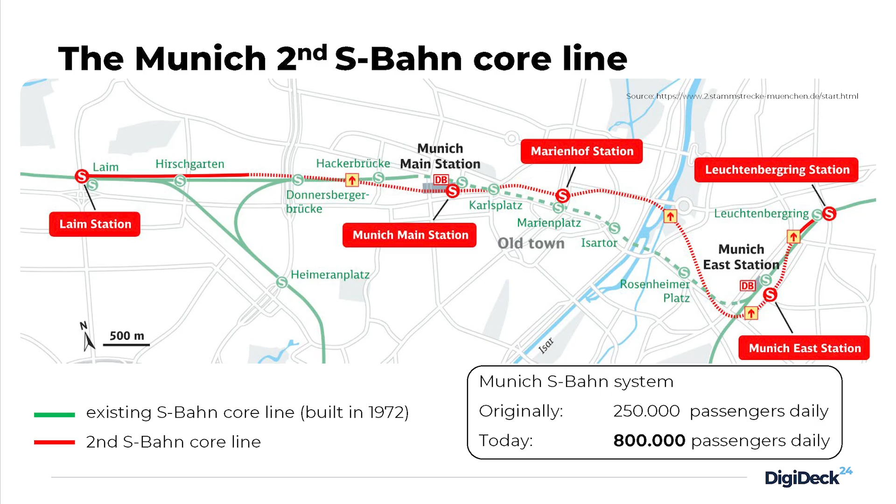As a result, in order to release the pressure on the existing core line, a second core line is to be built, and you see it here, it's the red line. It has the same direction from east to west, going through the center. The heart of the new line is a 7-kilometer long tunnel from Munich main station to Munich East, with Marienhof being the intermediate station.

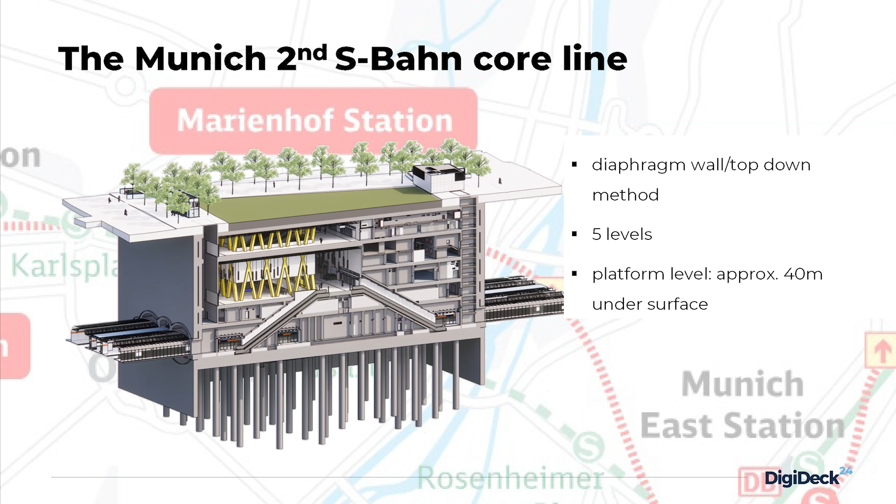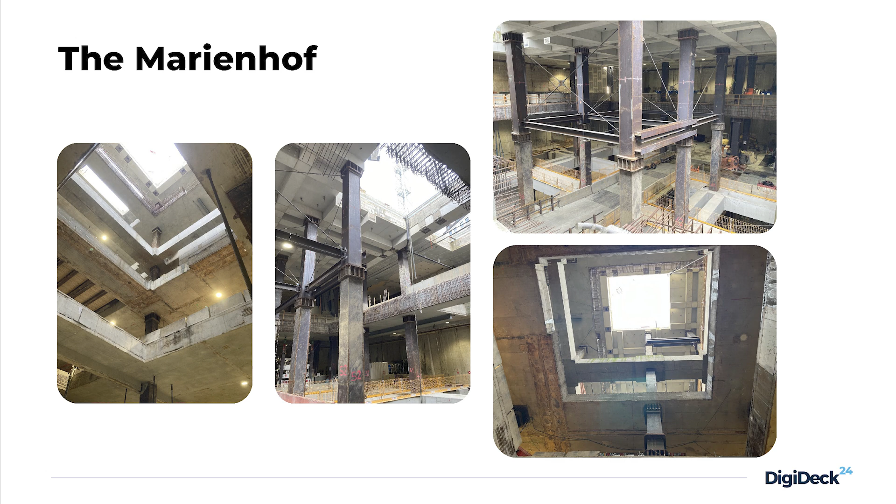Now, about the station itself, there are only 3 points I would like you to remember. The construction method used was a classical diaphragm wall, top-down method. The station has 5 levels, with the platform level being at a depth of 40 meters under the surface. Here are some pictures from the construction site, because everything looks small on our computer screens, but the actual dimensions on site are very impressive. You see, we have already reached the excavation level of the -5th level, so it can be even a little bit claustrophobic to be down there.

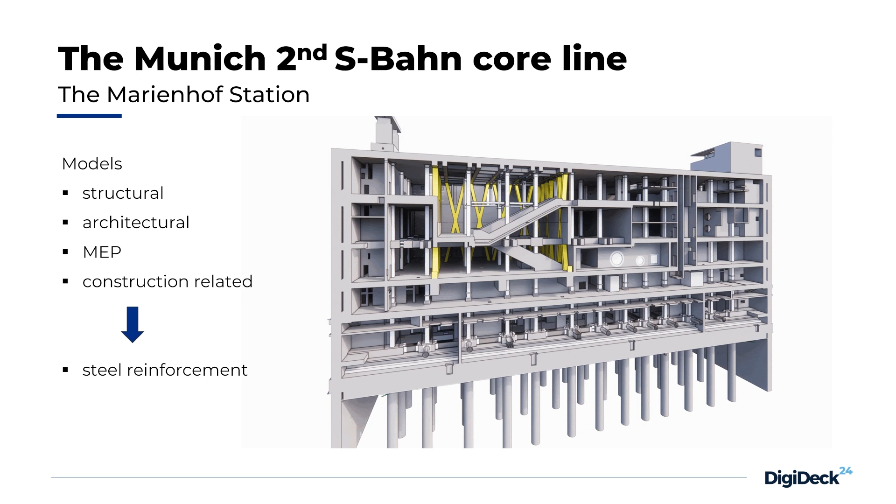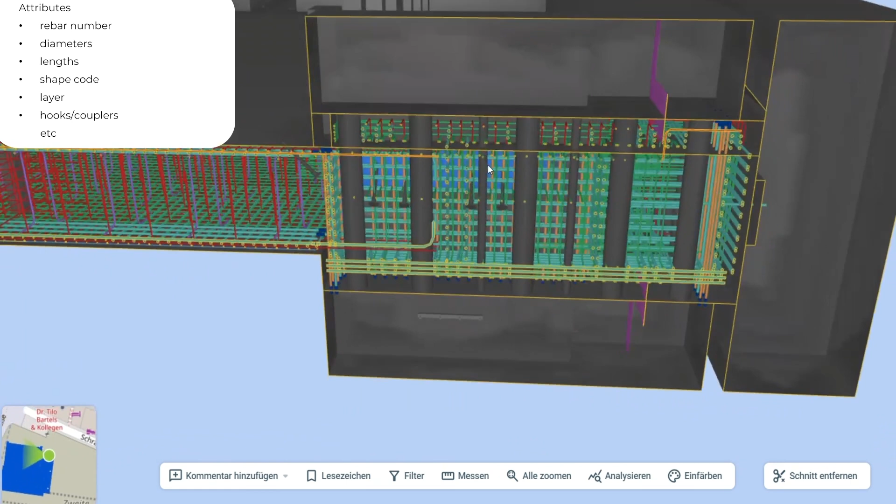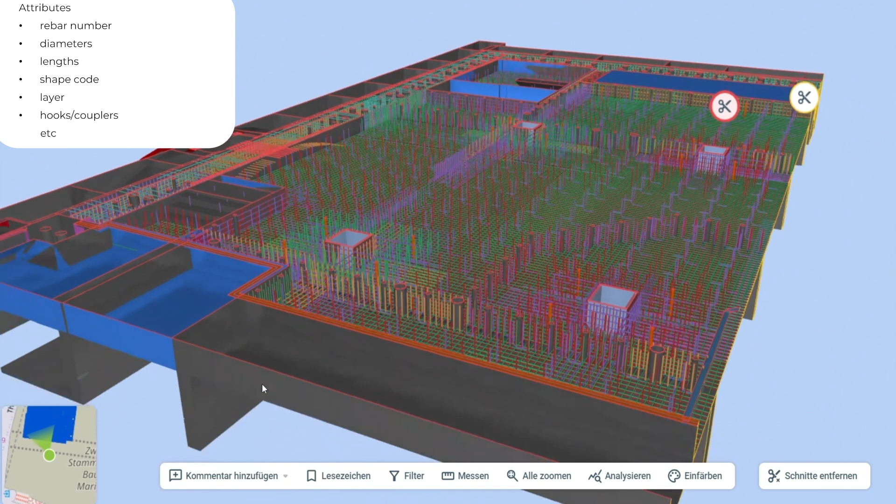Here you see an example of a reinforced slab. Of course, at the beginning there were some challenges with the modeling aspect, the software aspect, also considering the complexity of these components. For example, this slab is 1.5 meters high, almost my height. It's highly reinforced. Often we have 6 layers of reinforcement at the bottom, 6 layers at the top. Also remember, because of the top-down method, slabs are constructed before the walls and not the other way around. So we need to provide connecting reinforcement for the walls underneath and above the slab.

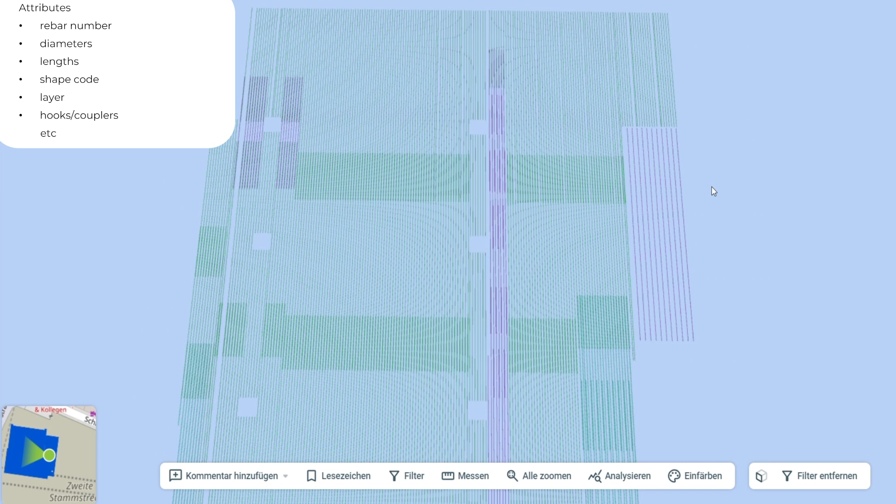So there are complexities, there were challenges, but they were in the end minor challenges because we were very soon able to create 3D reinforcement models without extended problems. Also, the BIM information content, the classic content, let's say, applies also for these 3D reinforcement models.

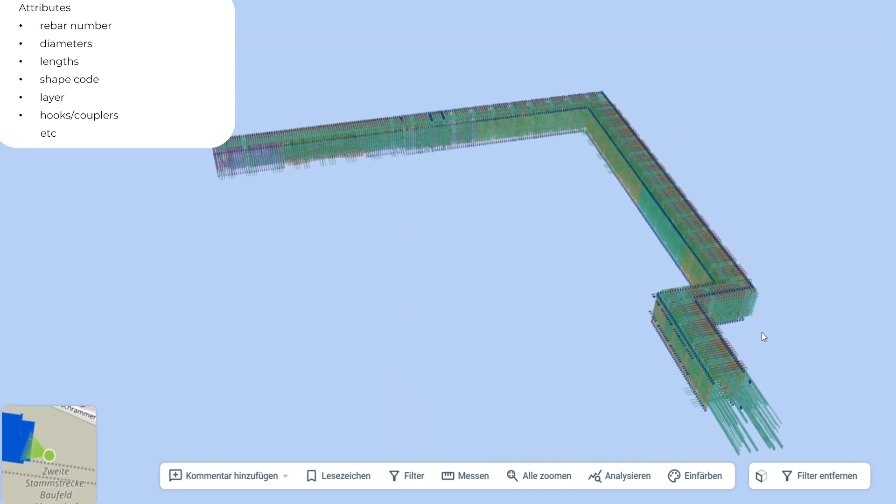We have information about the rebar numbers, the diameters, the lengths, the layers, the end treatment descriptions. Is there a coupler or a hook at the end of the rebar? So everything is included in the model, which makes it very easy to create lists, tables, and views according to these parameters. So far, so good. We have 3D reinforcement models. How do we proceed? What do we do with these models?

A few words about the conventional reviewing workflow. It looks somehow like this. We, the designers, produce statics and reinforcement drawings for the building owner, which are then reviewed, checked and approved by an external structural engineer.

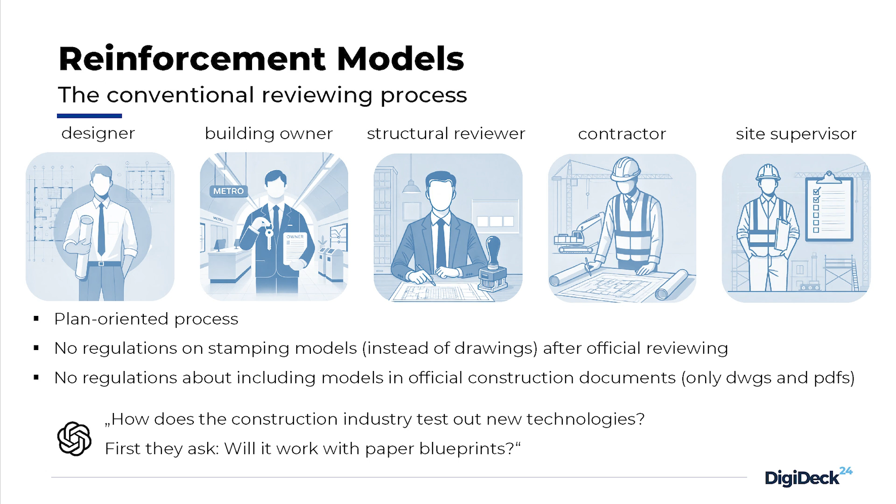After the approval, the reinforcement drawings are delivered to the contractor, the reinforcement is installed on the site, and in the end, the site supervisor comes, documents the installed reinforcement, and the reinforcement drawings are archived and become part of the official construction documents. So as you can imagine, the whole process is plan-based.

And there are compatibility issues with 3D reinforcement models, mainly in a bureaucratic sense. For example, there are no regulations about digitally stamping models, digitally signing models for official approval, or there are no regulations yet for including models in the official construction documents. Until now, only CAD files or PDFs are allowed.

Also, let's be honest, going directly from 2D reinforcement plans that have been used for 100 years to having a rebar model of this complexity on an iPad on the construction site seemed like too much of a big step. So we try to be realistic, and we try to find a middle solution, which are simplified drawings that accompany the 3D models. For example, you see here one of them for the slab.

There is a view of the layout of the reinforcement. There are some rebar tags and dimension lines because it's easier to have this dimensioning instead of having to measure the dimensions on the 3D model every time. On the other side, there are no rebar shapes on the plan like in the conventional reinforcement drawings because the rebar shapes can be easily seen on the 3D model.

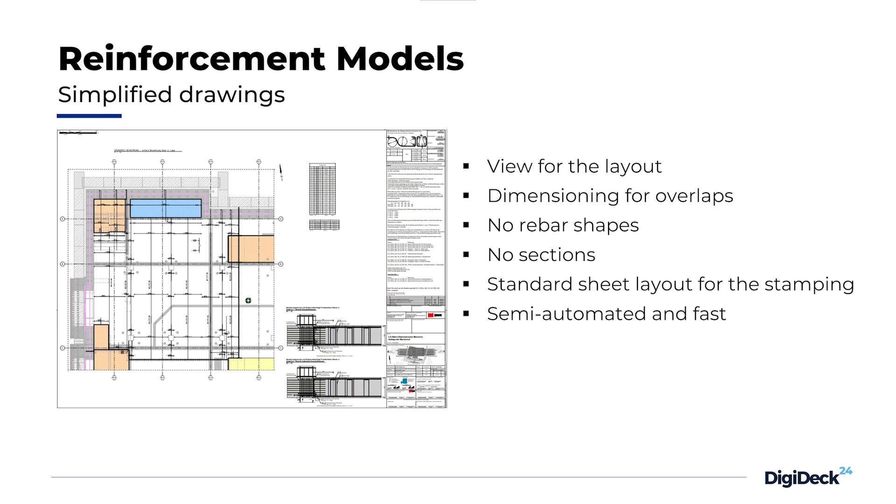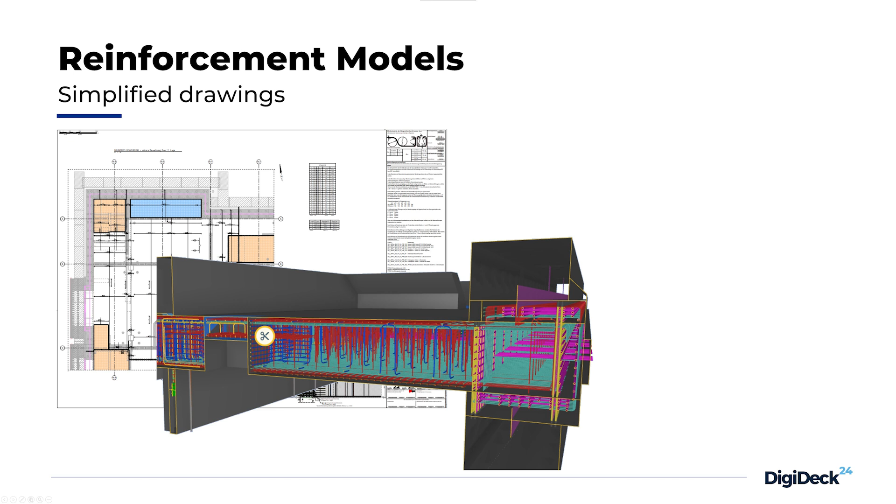Now, don't get me wrong, because these simplified drawings are by no means real reinforcement drawings. They are not sufficient in order for the reinforcement to be installed on the site. The model, on the other side, is not capable of going through the review process alone for the moment. Only the combination of those two can actually work.

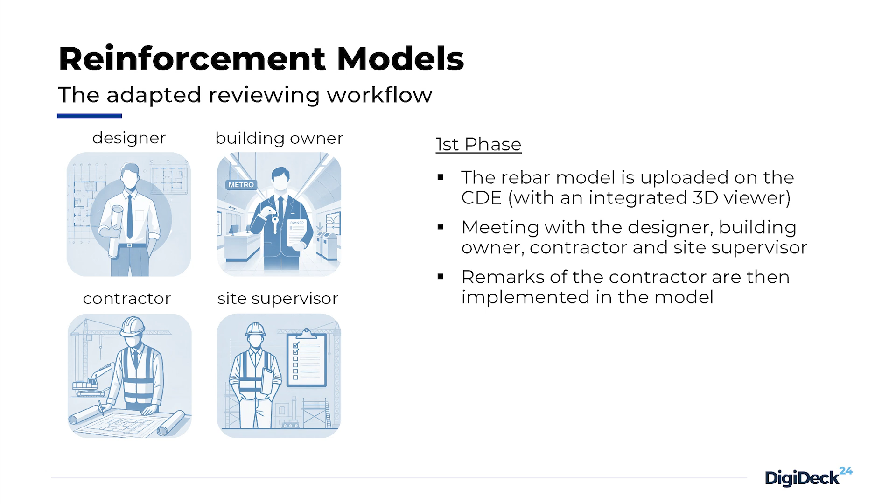So now we have different working material. Instead of having 2D conventional reinforcement drawings, we have 3D models plus simplified drawings. So we also need to adjust the reviewing workflow that now consists of 2 phases. In the first phase, we upload the model on a common data environment. It's a platform with a 3D integrated viewer where all parties have access.

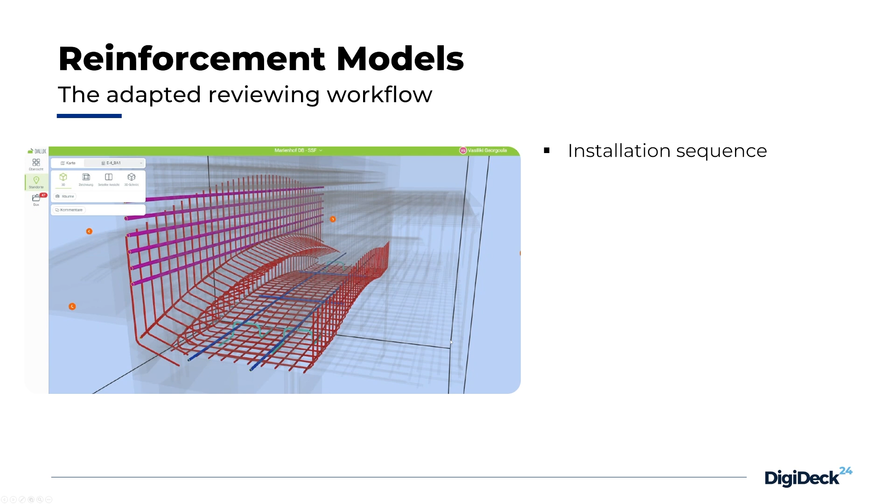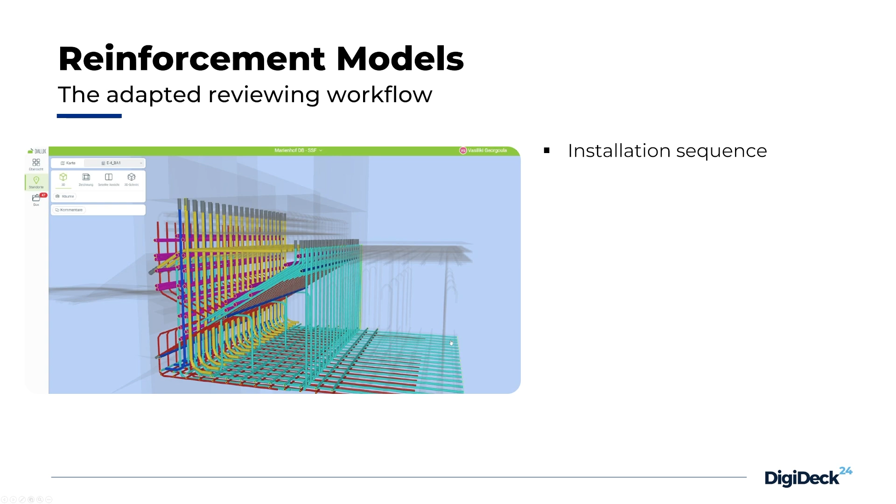And then we set up a meeting with the designer, the building owner, the contractor, and the site supervisor. We sit at the same table, we navigate through the model together, and we discuss points like the following. Installation sequence of rebars, especially in the complex areas. These kind of small films are very helpful for understanding the installation sequence or even finding out if the installation is even possible. We discuss adding or adapting installation bars.

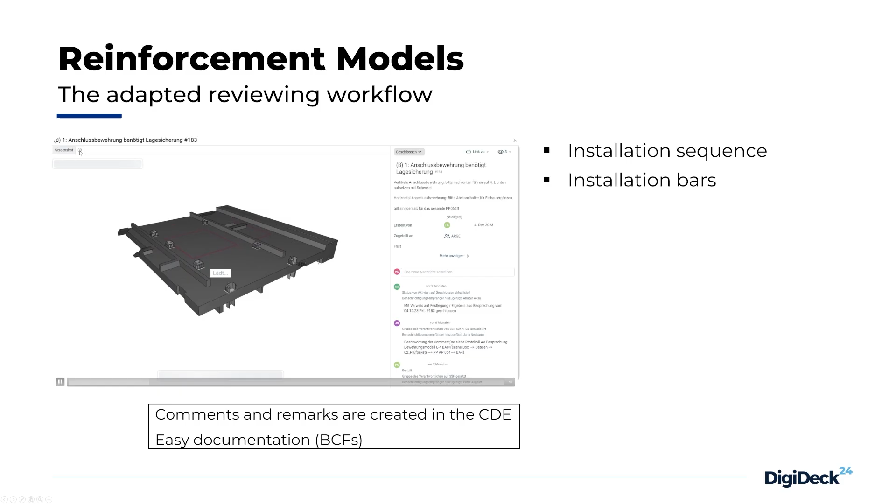Here you see an example highlighted in green. We needed to add some small stirrups or some small hooks to make everything more stable, let's say. We discuss points like these highly reinforced areas where concreting could be a problem. You see here 6 layers at the bottom and at the top. We modeled concreting openings like the green one to make sure there is enough space for the concreting. In some cases, we even needed to leave out some rebars so that there is space.

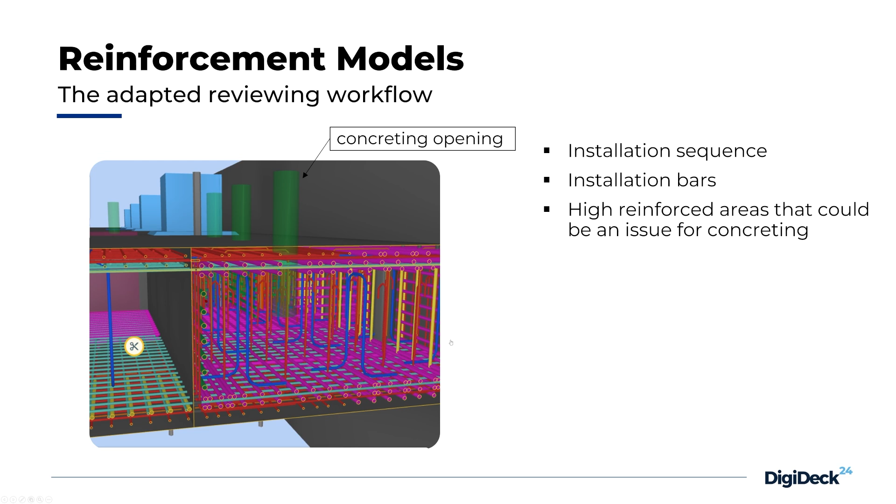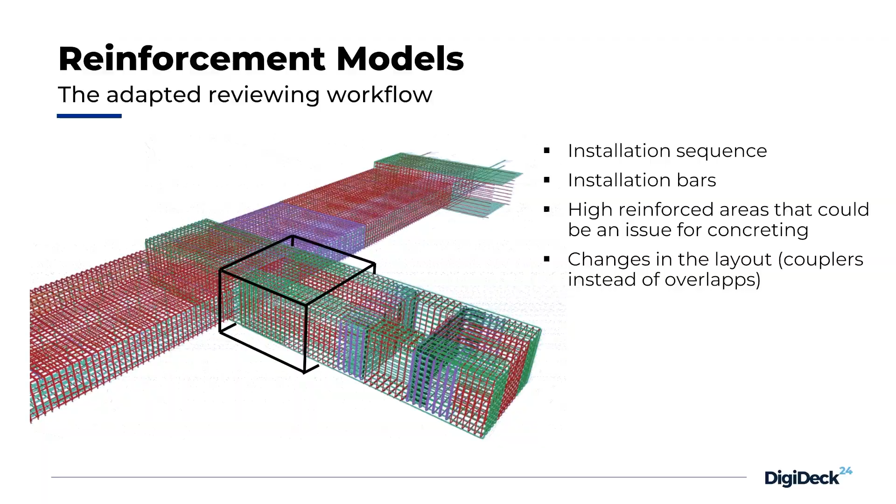Or we discuss points like changes in the layout of the reinforcement. Here you see an example of two connecting parts. They are connected by overlapping rebars. It was discussed if maybe we should use couplers so that there are no rebars sticking out of the concrete and there is more room for people and machinery to pass through this zone. And many more points, but I guess you understand the things that are discussed in this meeting in this sense.

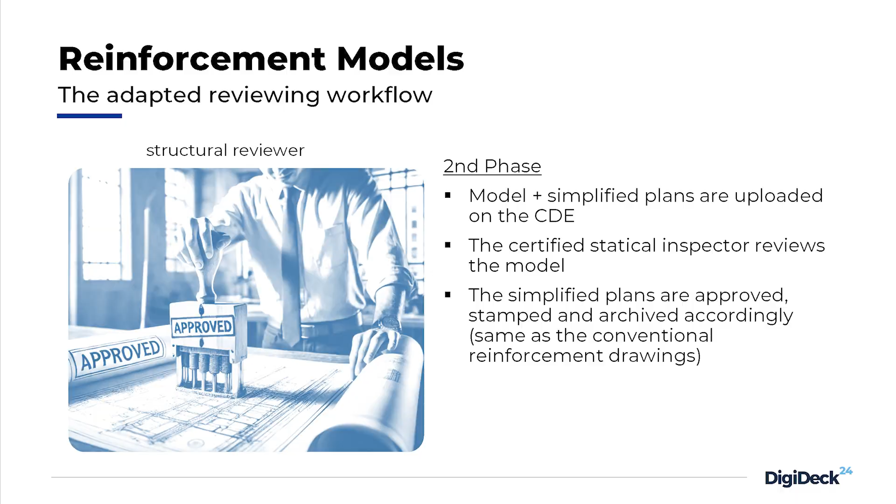Now, the second phase of the adapted reviewing workflow looks more similar to the conventional one. After we implement the wishes of the contractor in the reinforcement models, they are re-uploaded in the CDE, this time together with the simplified plans. The model is reviewed and checked by the external structural engineer, and then the simplified plans are stamped accordingly, like in the traditional sense, and they are archived, and that's how the review process is completed.

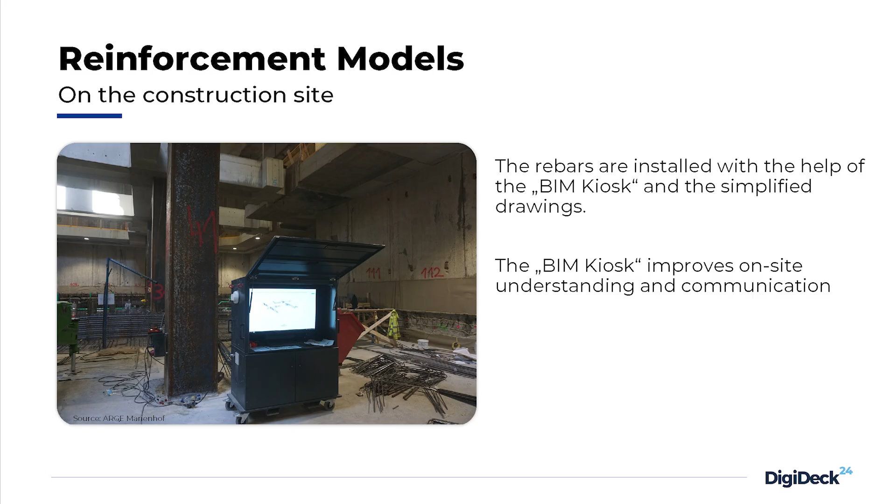Now, for the construction site, there is no extra step needed in order to deliver the plans on the site or something like that, because of the so-called BIM kiosk you see here in the photo, which is nothing more than a computer with a big monitor connected to the CDE. It's a very inexpensive solution, and the models are from the beginning in the CDE, meaning that they are available from the very early design phases on the construction site too.

The reinforcement is then installed on the site with the help of this BIM kiosk, with the help of the 3D models and the simplified plans. And as you can imagine, such a BIM kiosk on the site can improve understanding of layout and improve communication on site.

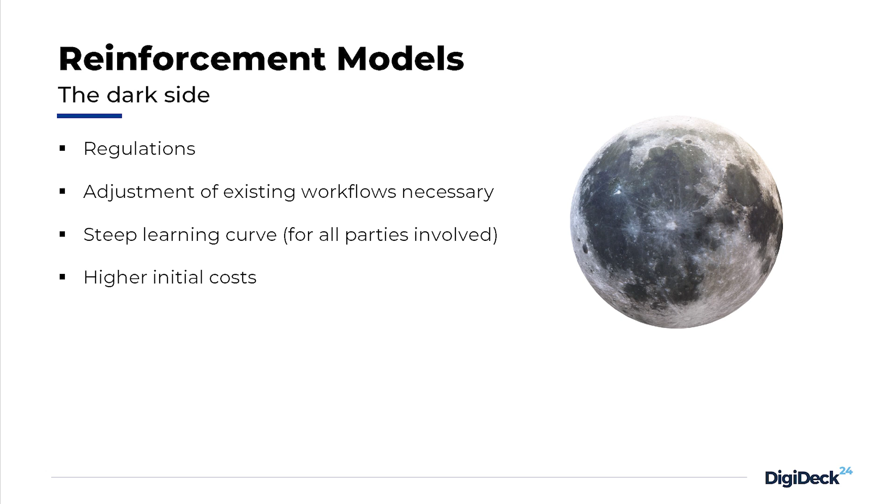Coming already to the conclusions of this session, I would like to highlight some advantages and disadvantages, starting with the dark side of the moon. So we have seen that the regulatory bodies need to work and develop regulations that support this kind of BIM workflows. We have seen that existing workflows are not relevant anymore and they need to be adjusted or even reinvented. There is a steep learning curve for all parties involved, which unfortunately leads to higher initial costs. This is a very typical disadvantage of BIM, but the bright side outshines all these disadvantages, in my opinion.

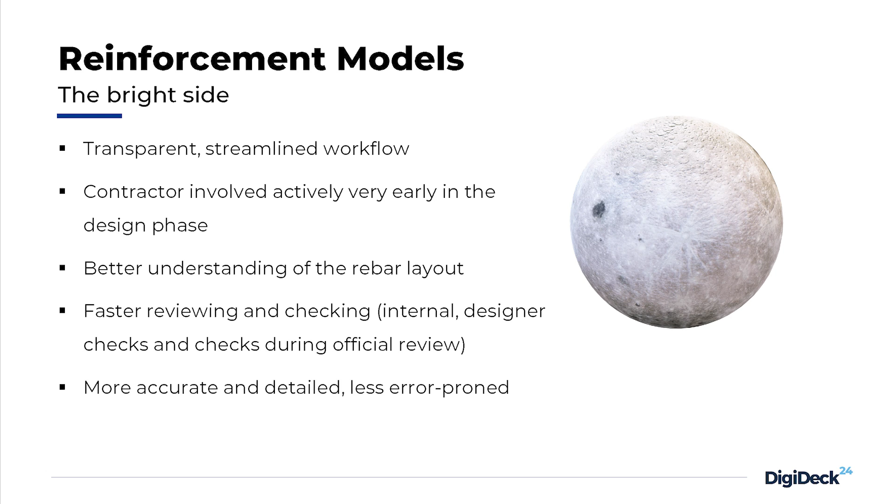We have seen that this workflow is very transparent, streamlined, meaning that from the very early design phases to the execution until the reinforcement is installed and documented, there are no communication gaps. The contractor is involved in the design phase very early, but most importantly, very actively. And of course, with the 3D reinforcement models, there is better understanding of the layout, which leads to faster reviewing and checking, not only for us internally, for the designers, but also for externals, for the contractor, for the external structural engineer. And all in all, the whole workflow leads to a more detailed, accurate, and less error-prone design.

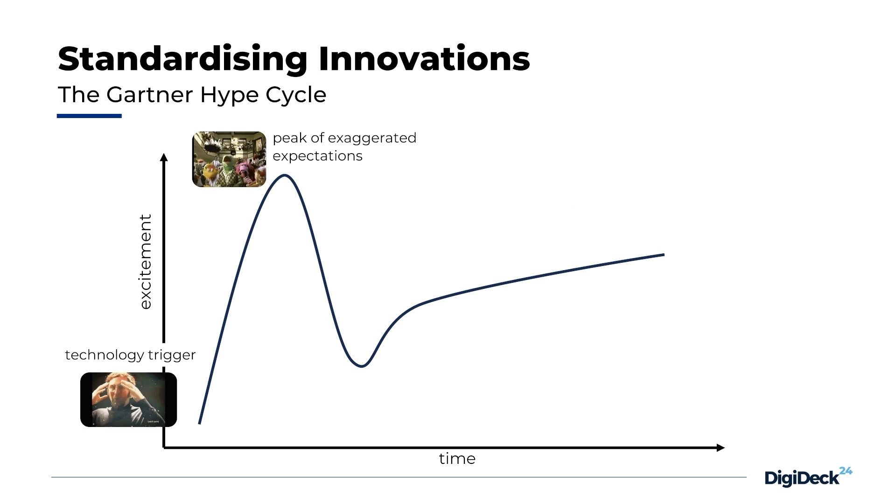This is the last slide of the presentation. So I would like to repeat what I mentioned at the beginning of my presentation. It's not about 3D reinforcement. It's about making innovation standard. And here you see the Gartner hype cycle, which shows the path of innovations. It starts with a technology trigger, which is soon followed by a peak of exaggerated expectations. This innovation is amazing and it can do so many things, this and that. We are so much faster, so much better quality.

Unfortunately, what comes next is the trough of disillusionment. It's the point where we realize it's amazing, but we need to learn the software and it takes too much time, it's too much effort. It's amazing, but we need to train our people. It's amazing, but there are bureaucratic barriers, or it's amazing, but it costs more. That's why this is a critical point, because a lot of people give up at this point. And that's why the next phase is, in my opinion, the most important one.

The slope of enlightenment. It's the phase where we need to realize that, first of all, all parties involved need to sit together, contractor, site supervisor, building owner, checking engineers, in order to, first of all, recognize the advantages of the innovation. It's not about reinforcement, it's about innovation. Recognize the advantages, recognize the barriers, and try together to find solutions to overcome those barriers, because only then can we really reach the plateau of productivity.